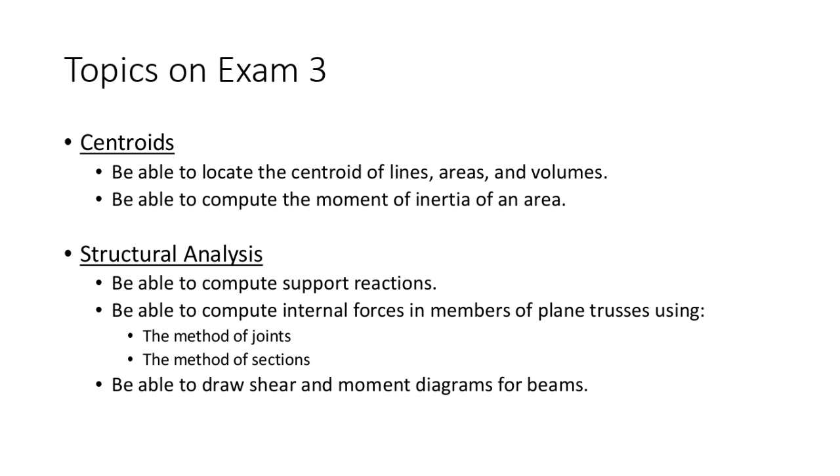And number 2, I've really tried to do my best to ensure that this isn't a time crunch. I know that's probably a concern you have, with some of the homeworks and exam problems you've done. I've really tried to make the problems manageable and contained. So that's just something to keep in mind. Obviously you want to be organized and moving through the exam, but I've tried to formulate the problems to accommodate that.

In terms of some review content, the rest of this presentation is just formulas. Now let me say this, I'm not foraying too heavily into the 3rd dimension, but that doesn't mean you don't need to understand concepts related to it, because there are conceptual questions on the exam as well. So I might ask some short answer questions on 3D. I don't want you to ignore it. I'm just saying we only have 50 minutes, and I don't want to focus too heavily on that one topic because we've got a lot of other stuff to cover.

Make sure that you understand the concepts of moments of area. The integral of dA is your area. The integral of x dA is your first moment of area. We use the first moment of area to determine centroids. The second moment of area is used to determine the moment of inertia. The second moment of area is the moment of inertia.

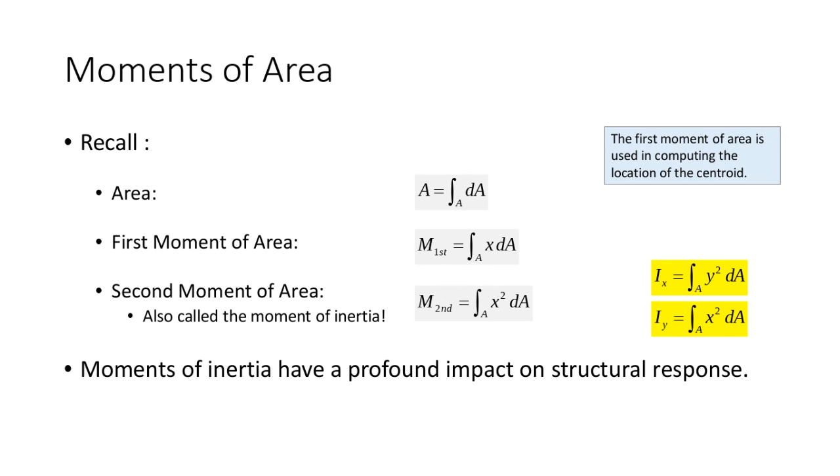I went ahead and threw in this slide. In our lecture notes for centroids, this slide popped up a lot. It was just the 2D centroidal reference table. This is not a comprehensive list, and I don't want you to look at this and say this is all I need to know. But this is in your textbook, and it's in the NCEES reference manual.

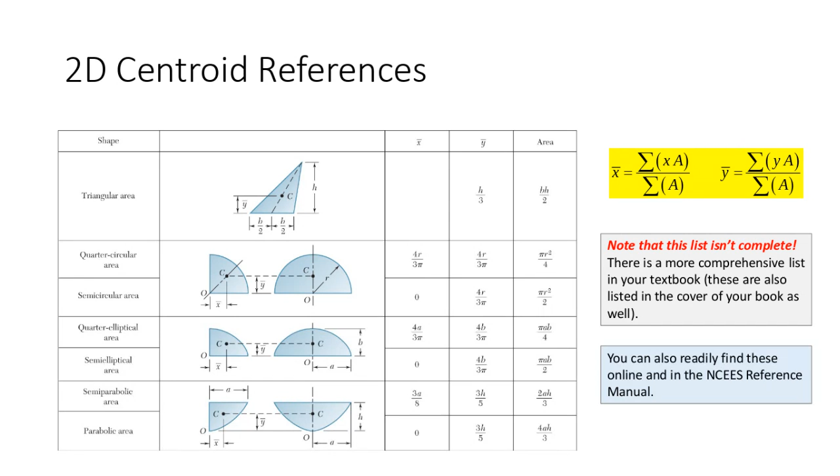I don't have a problem with you finding additional centroid references, but just make sure that you know where they are in the book. Make sure you have them available, because centroids is a part of this exam, and this is a necessary tool. So make sure you have this readily available, because I don't think it's a spoiler alert to say that you're going to be using this on the exam.

I did go ahead and include the 3D centroid references just for completion's sake, but again, as I said, we're not delving too far into the 3rd dimension on this exam.

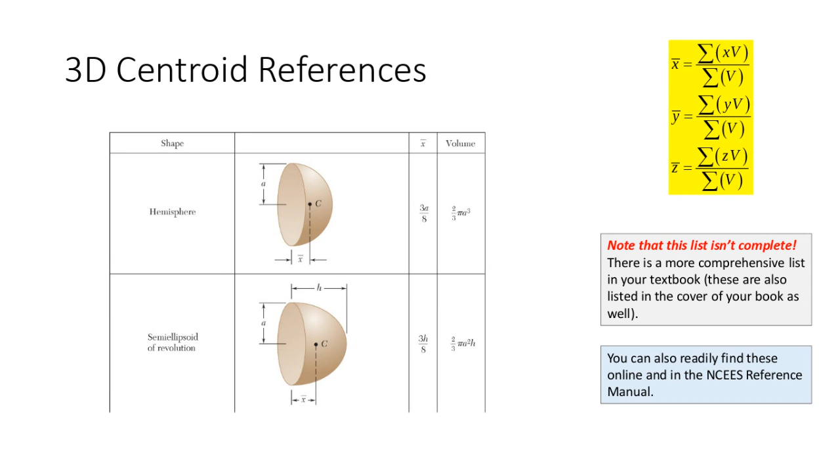And I'll go ahead and tell you that our final topic in this class, which is friction, doesn't delve too heavily in the 3rd dimension as well. I know that doesn't really have too much to do with our exam, but friction isn't really a massively 3D topic. It's largely a 2D topic. But I thought I'd throw that out there.

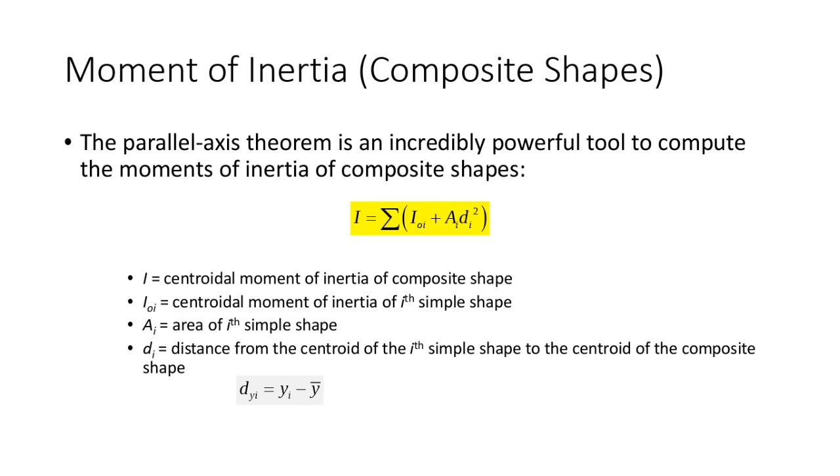I went ahead and threw the formula or the algorithm for determining the moment of inertia using the parallel axis theorem. The hardest part, I'd say, is probably your d distances, but that's just y minus the y bar for each shape. References for moments of inertia as well. Probably not a bad idea to have that available also.

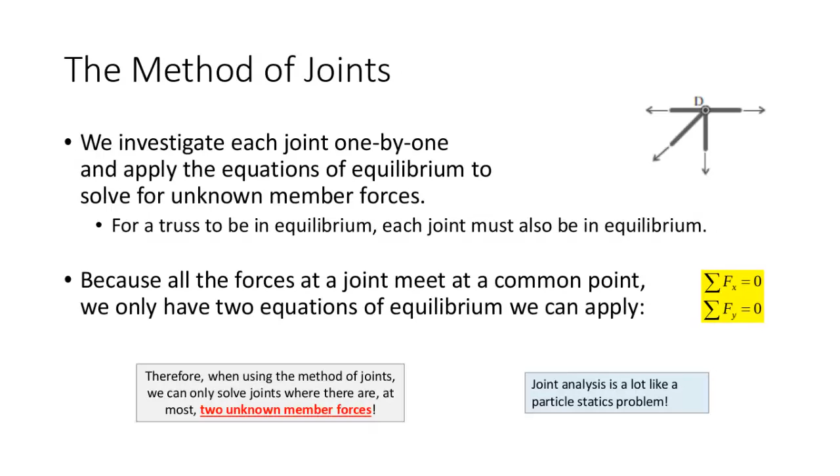And then we're getting into the structural analysis component. So just the data or the description of the method of joints, the method of sections. And then the last few slides are on the derivation and the derived relationship between loads, shears, and moments when you construct your shear diagram.

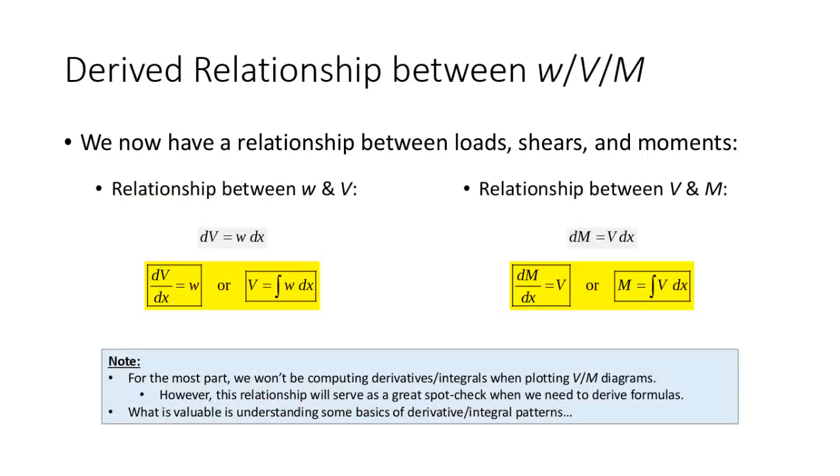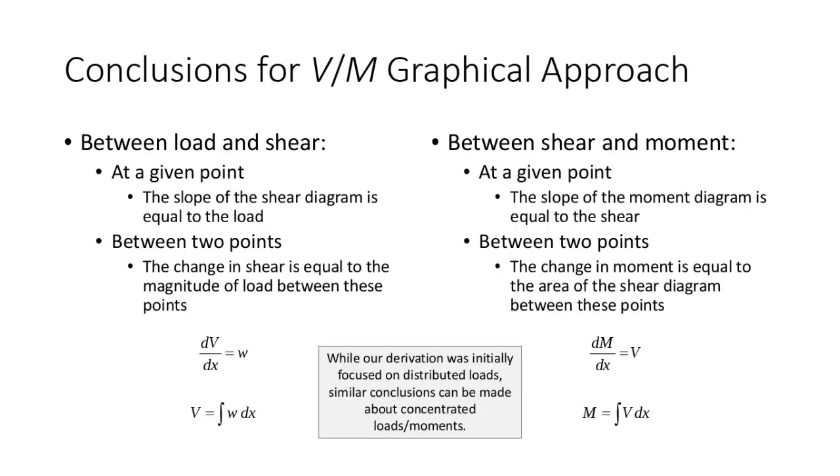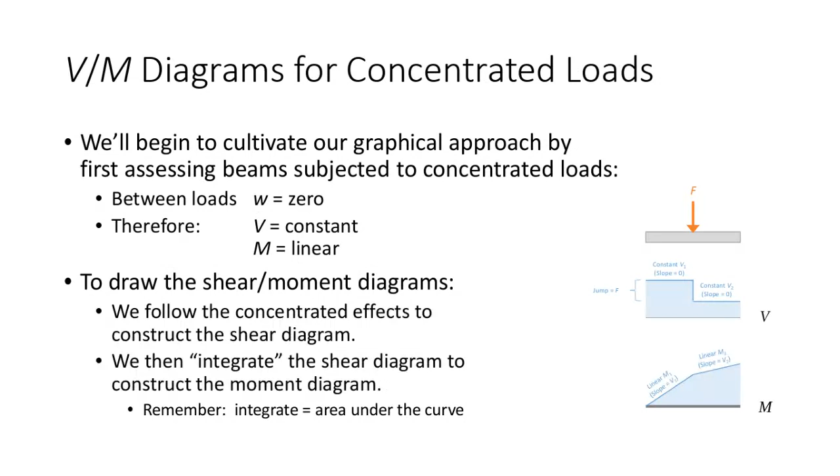So this is our derived relationship. These are the conclusions that we made for our graphical approach, like between shear and moment. If you compute the area under the shear diagram, that gives you the moment diagram, all of that. And then our methodology for constructing shear and moment diagrams for regions subjected to concentrated loads and for regions subjected to distributed loads. And that's the review slides. That's pretty much it. So yeah, that's going to be it for what's covered on the third exam.

And with that, I'm just going to turn it over to you and see what questions you have and see if there's anything I can address. Floor is yours.

We can. I'm afraid during the review, well, we can, and I see a couple people agreeing with that. I'm afraid during review that a quick joints problem will turn into the entire review, and that's fine. I have no problem with that. But if there's any shorter questions, then I want to give those their time as well. And I mean, if there aren't any, we'll do a joints problem, and that'll be the review. Give me 1 second.

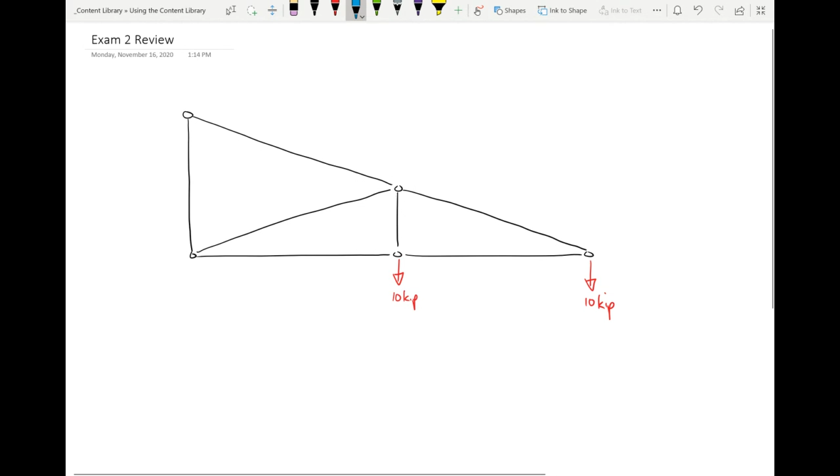Actually, hold on. Actually, let me see. Raise that a little higher. Sorry, I'm trying to make this neat. Okay. First off, before I continue, is this unique enough? Is this a good problem? Okay, good. All right, so this is a truss that's an overhanging truss.

The dimensions on this are, this is 12 feet. This is also 12 feet. And these dimensions here are 5 feet. Okay, so yeah, so this is going to be our problem.

Before we delve into this, because we've had requests to do both method of joints and method of sections, I'm probably going to go somewhat expeditiously through this problem. So like as I'm going through this, I'm going to try and take pauses and see if people have questions, but at the same time, I'm going to be moving a little bit.

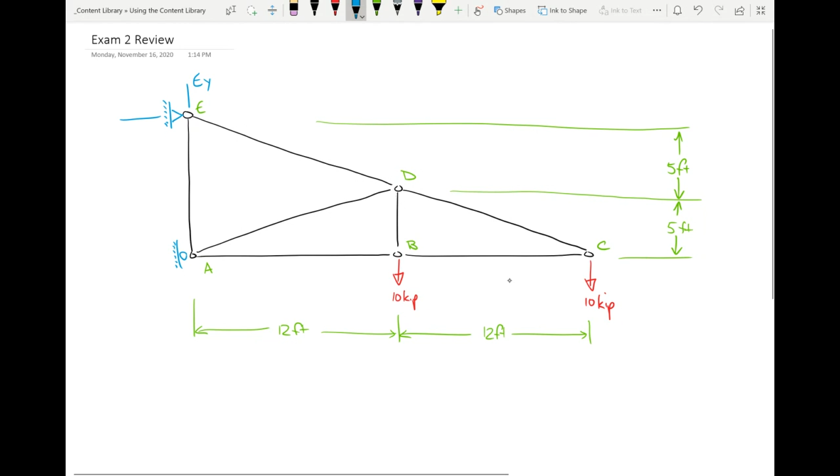So with that, first thing we need to do is compute the support reactions. There's going to be a reaction here, EY. There's going to be a reaction here, EX. And there's going to be a reaction here, AX. That's a roller, so it only has one reaction in the direction of the roller, and since the roller is facing left to right, it's going to have a horizontal reaction.

First, I'm going to compute the vertical reaction, and that's pretty easy. If I sum forces in the Y direction, I've got 10 going down and 10 going down, so EY has to be 20 kips going up. That's going to be 20 kips.

I'm assuming it doesn't matter which direction you look when cutting sections of trusses, like in homework 6.2. It ultimately does not matter because equilibrium doesn't care which direction you analyze.

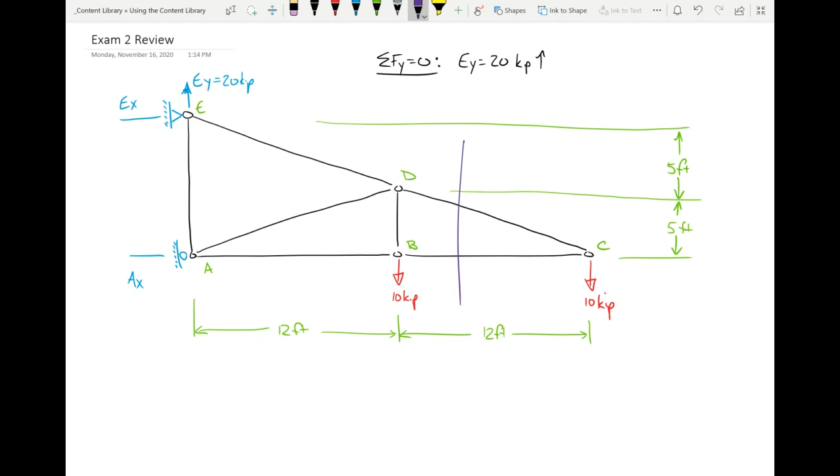That being said, there are advantageous directions to look. There's nothing stopping you from cutting a section through here—it really wouldn't be necessary, because for something like this I'd just use a method of joints. But for the sake of discussion, if I cut a section here, I could look to the right or to the left. I'd look to the right, because there's a lot less going on looking right than looking left. Equilibrium doesn't care, physics doesn't care—you'll get the same answer either way.

But just because equilibrium and physics don't care, doesn't mean the amount of lead your pencil expends on the paper won't care. One of these directions is just going to be less work, so I tend to look toward the direction that makes the problem faster—I tend to be lazy in my calculations. If you have a truss with members all over the place and you're cutting a section, I'd look to the right because there's less going on there than to the left. Be lazy in your analysis.

Fire these questions away as I'm doing this math—this is your review time, so don't hesitate.

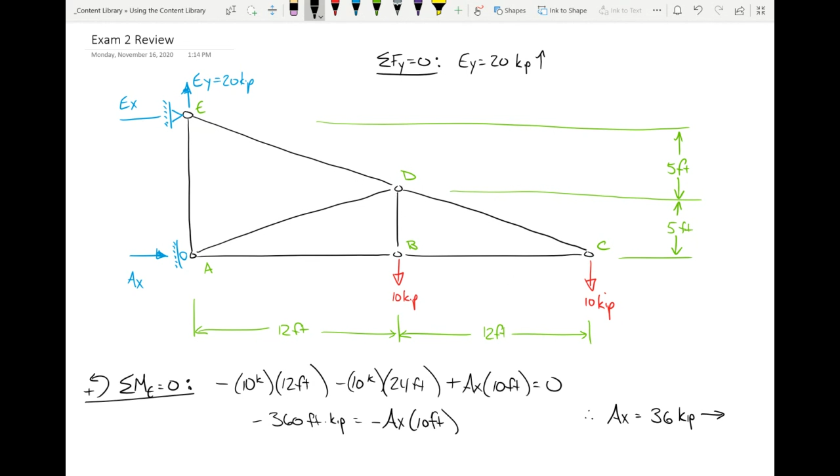So I got 20 down, so 20 up, and now I need to sum moments. I'm going to sum moments about E—it doesn't really matter. Summing moments at E, I've got 10 kips, which is negative, times 12 feet, minus 10 kips times 24 feet. AX has to resist that, so plus AX times 10 feet equals 0. 10 times 12 is 120, 10 times 24 is 240, so that's minus 360 equals negative AX times 10 feet. So AX is 36 kips going that way. And if AX is 36 kips that way, with no other horizontal forces, the sum of forces in the X direction equals 0 tells me EX is 36 kips going the other way—that's a force couple, equal and opposite.

So this is 36 kips, and this is 36 kips. Is everybody okay with that? Any questions before I move on? Because you've got to be able to do this for trusses, for shear and moment—if you can't do the reactions, or can't compute the support reactions, that's going to be a challenge.

Okay, so we're going to take this truss and we're going to do it two different ways. We're going to do the method of joints and we're going to do the method of sections. So let's do the method of joints first.

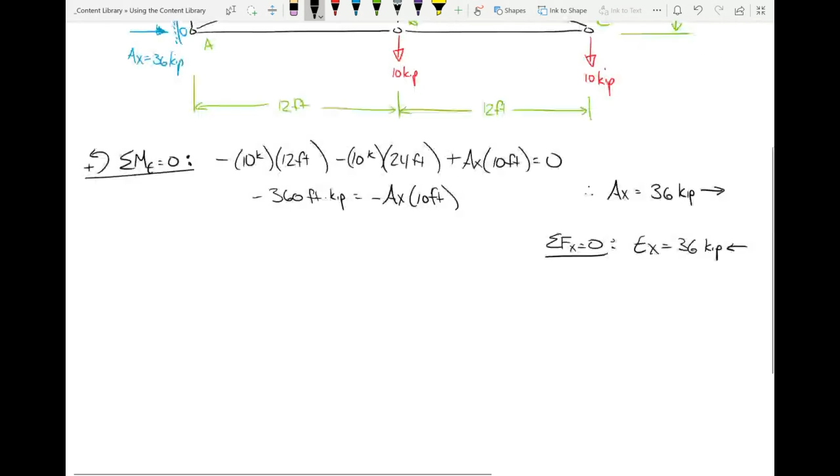Let me write something down real quick because I don't want to scroll a bunch. I'm just cheating and writing down the reactions for me as a shortcut. Okay, so first off,

the method of joints. Now, before I do the method of joints, the first thing I want to indicate... what, hold on, what?

Well, it's going to the left, yes. If you consider negative, yeah. I mean, I guess you could say that, yes.

The one thing I want to clarify, whenever you start expressing forces and directions and results, is it's okay during the math to treat values as positive or negative. That's fine. But what matters, and what's really going to matter from an engineering perspective, is the context.

See, in your comment, you said that EX has to be negative. Well, yeah, EX is negative if you consider positive forces to the right. What I really care about is that EX equals 36 kips to the left.

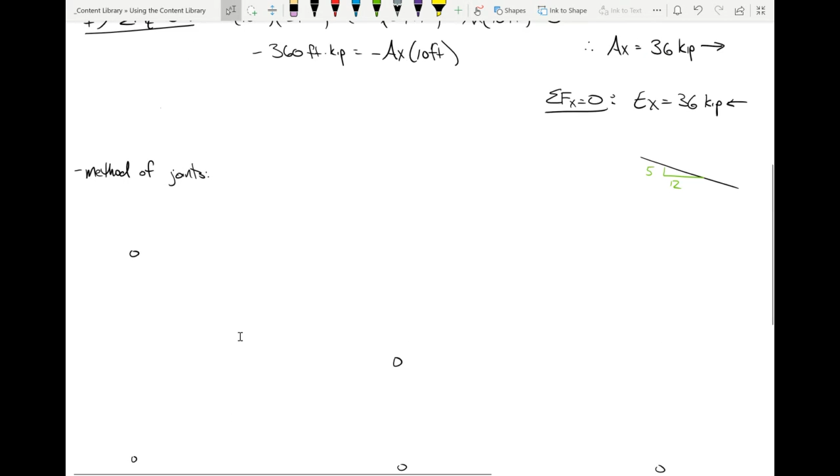Now, when I do this, one of the things I sort of glossed over with this example is if you look at all of the diagonals, they are at a 5 to 12 slope ratio. On this problem, as you can see, they all go over 5 and up 12.

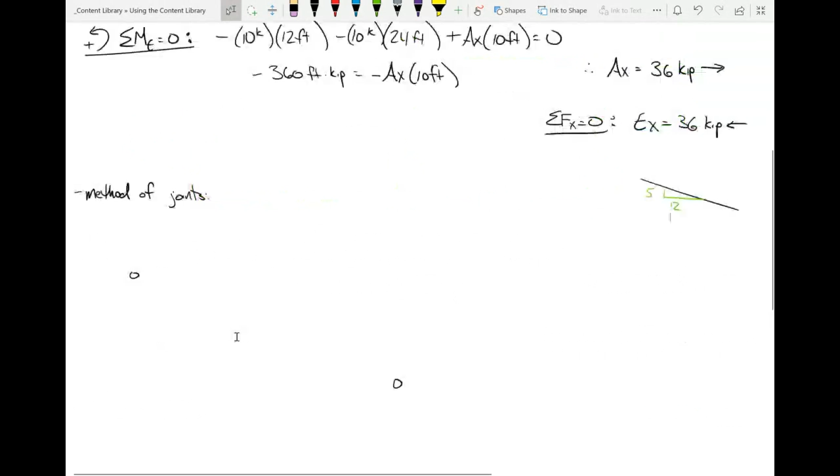So, over 12 and up 5 -- I said that backwards. Because they're at a 5 to 12 slope ratio, does anybody know what the hypotenuse is on a 5-12 triangle? I'm just curious. 13, yes. Like a 3-4-5, a 5-12-13 is a special triangle.

So there you go. Okay, let me start off by putting my diagonals here -- or sorry, not my diagonals, my members. Okay, so there's my members.

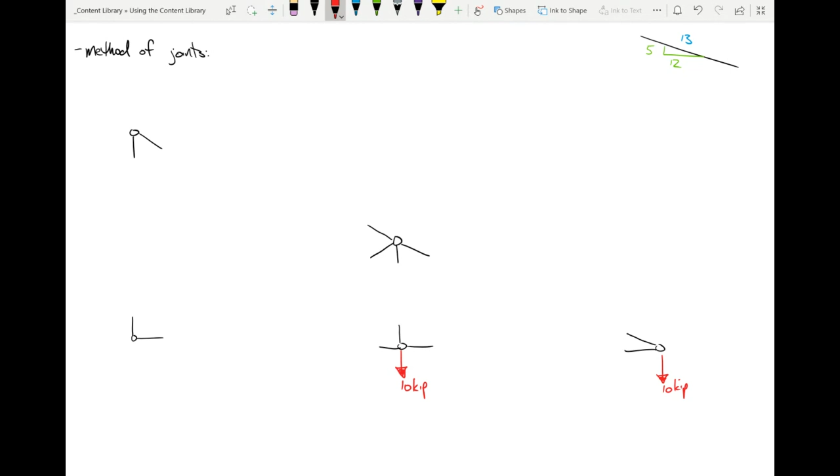Next thing I'm going to do is put my applied loads. And the next thing I'm going to do is put my support reactions. So we got this was 20 kips. This was 36 kips, and this 36 kips.

Now, I apologize, this is my last time I'm going to scroll up and down. Just making sure I remembered how I labeled them, right? So this was A, B, C, D, E. Sorry for the scrolling up and down.

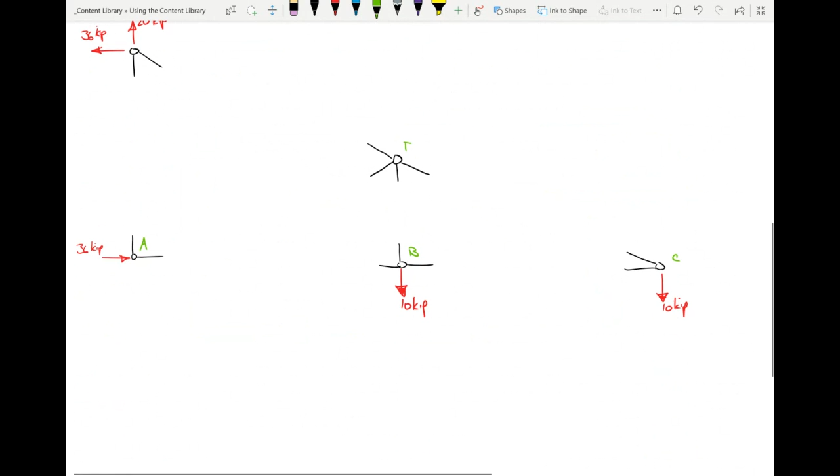I'm really trying to not do that. I couldn't remember how I labeled them because they're labeled a little differently than they are here in this book, but I thought this made a little bit more sense. Okay, all right, so this is our problem.

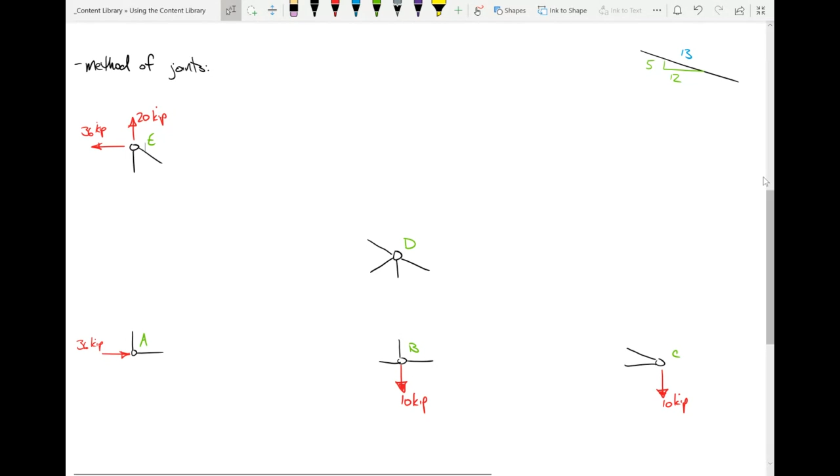Now, who in chat can help me out with something? When you're doing a method of joints analysis, what's your limit on your joints? Oh, I forgot one. There's a member right here.

Who remembers the limit? There's a limit on when you do a joint analysis. Two per 2D joint, exactly. So when I start my analysis, I cannot start right here, I cannot start there, there's too many unknowns. I've got 4 members, that doesn't mean I can't solve joint D, I just can't solve it now. What are the 2 joints that I can solve right now? E and C. So it doesn't really matter which one we start with. I'm going to make an executive decision and say we're going to start at joint C.

So joint C has 1 horizontal unknown here, and then it has 1 horizontal, 1 vertical right there. So let's sort of track this out. If I've got 10 down, 10 up.

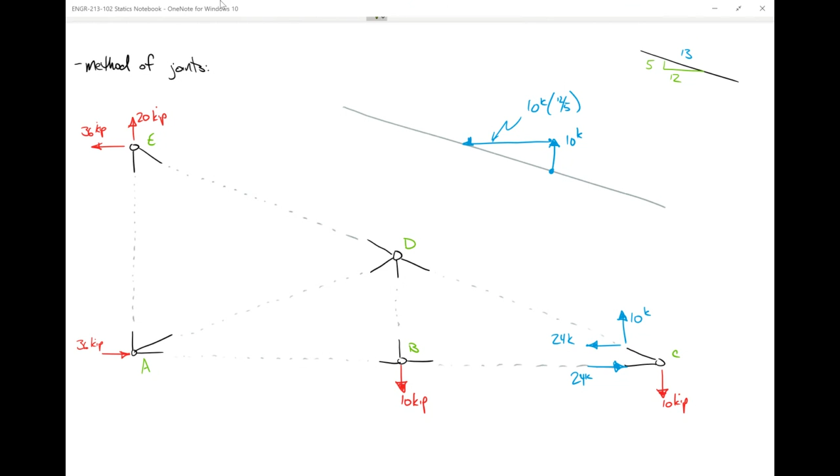Now what I'm going to do is I'm going to start transposing the results onto the adjacent joints. So this one's going to be 24 kips, this one's going to be 10 kips. And then remember, when you go to the next joint, opposite directions. 10 up means 10 down, 10 to the left means 10 to the right. Again, think of that tug of war example, equal and opposite, equal and opposite. This one right here, 24 to the right, 24 to the left, right? And I'm using a different color for those because what I'm trying to do is track, okay, when I look at, let's say, joint B, I knew the 24 kips from the adjacent joint over on the right.

So yeah, okay, now I want you to look at the truss right now and tell me which joints, plural, I could do right now. Now we had said joint E before. There you go, we could do joint B right now. And I don't know about you, but I like to do joints that have less diagonals going on because there's less to figure out, I can move faster through the problem. In other words, look at joint B: 10 down, 10 up, 24 to the left, 24 to the right. Done.

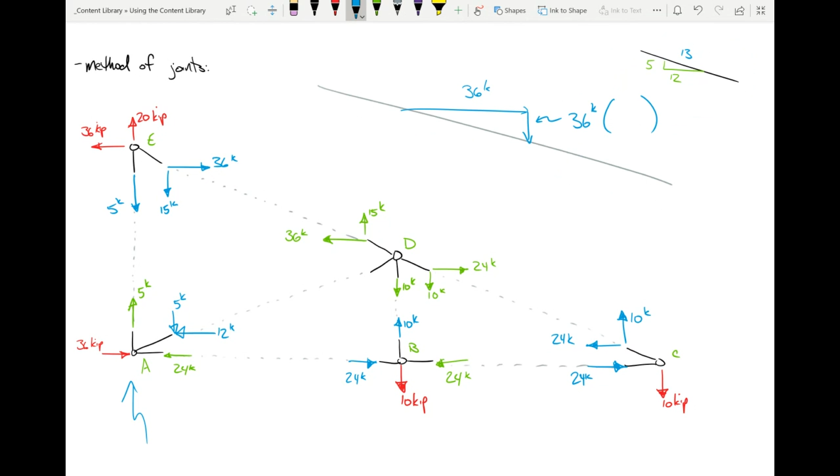How did you get 15 again? Oh, are you talking about that one right there? Okay, give me one sec. So here's the member, and we had that this was 36, right? So how do you get that? Well, we're going to take 36 and multiply it by one of two things, either 12 over 5 or 5 over 12. You can see from the slope ratio that what we would need to do is multiply it by 5 over 12, because that leg's going to be the smaller one. So 36 times 5 over 12 is 5 times what? 36 over 12 is 3, which is 15. So all I'm doing is using the slope ratio.

No, that's fine, that's why we're here. So if there's any questions about that stuff, let me know. Oh no, that's fine, that's fine. We'll still probably take a look at this method of sections because I still think it's beneficial. I'm sorry, I'll try and get this posted to YouTube as soon as I can.

Okay, one final thing I want to do is look at this member. This is 12 kips, this is 5 kips. If you look at this last joint, and again follow my color scheme here, there's nothing to do on this joint because it's completely solved. We already know all the forces, but just look at the values. It's really slick how everything matches up, okay? Look at this, look at your verticals. Watch your verticals. This goes up, that goes up, 20 going up, 10, 20 going down. What about your horizontals? 12, 24 to the right, 36 to the left. Everything matches. It's so cool how that works out, that in the end it all balances.

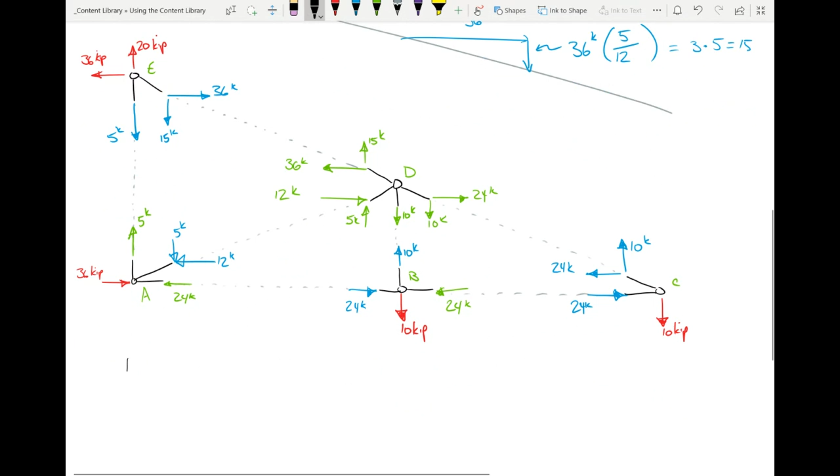Right? So let's handle the horizontals and the verticals first. Let's start with this member, BC. Member BC, we know that the magnitude is 24 kips.

The question is, does member BC experience tension or compression? I'm asking you. All right, we got tension. Now that is incorrect, okay? The reason why is, here's the joint, here's the joint. Both of those 24 kips are pushing on the joint, right? Yeah, I said BC, I'm sorry, maybe I was looking at the wrong one, maybe I was saying the wrong member.

See, if you have a truss member in your hand, so like if you see me on camera, I've got a member in my hand. Now imagine if I wanted to apply compression, I'm going to push on the member. What's happening on my hands? The member is pushing back on my hands. So those 24 kips, they're pushing on the joints. Member BC is 24 kips in compression, right?

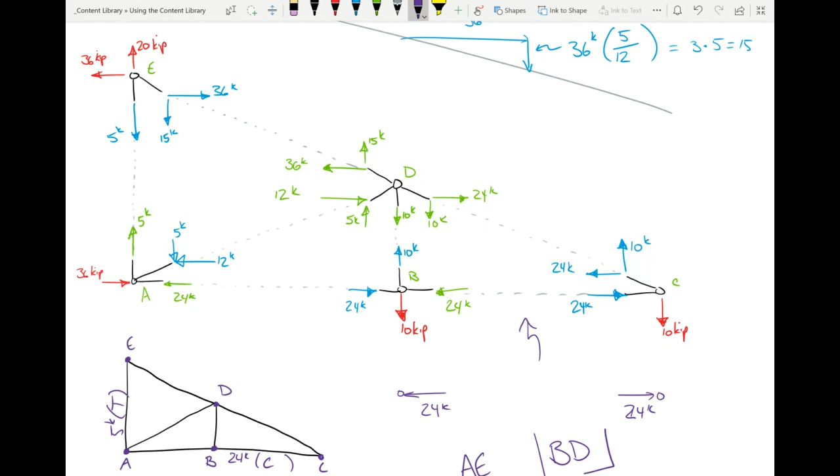All right, let's try another one. BD. Somebody help me out with member BD. What's BD experiencing? It's experiencing tension, and how much? There we go, 10 kips in tension.

So to summarize, this is what you're doing: you go to each member and identify whether it's experiencing tension or compression and how much. Member AB is experiencing 24 kips in compression. So that's going to be 24.

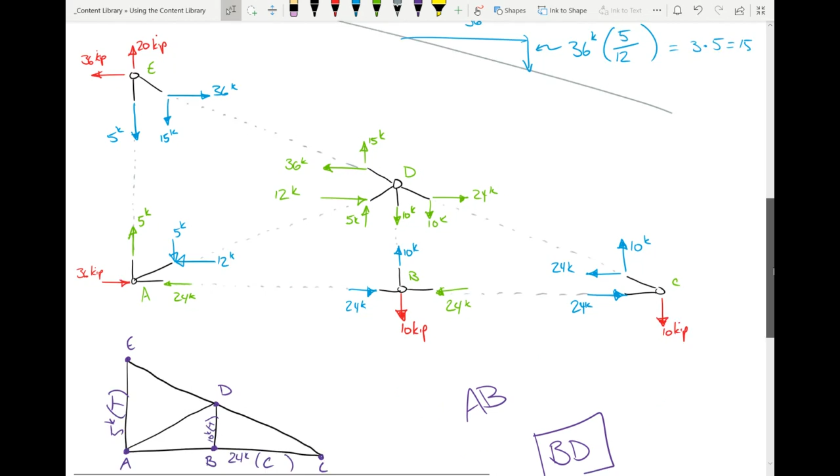As for the remaining members, which are diagonals, just break out the Pythagorean theorem. For instance, member AD is a diagonal member. First off, is member AD experiencing compression or tension? Compression, exactly right. And as for how much, just use the Pythagorean theorem. What is the square root of 5 squared plus 12 squared? 13.

Now we're running short on time. I could try to knock out a super quick sections analysis, but we're probably going to bleed over a bit, so I was a little afraid of that. But does this make sense? This is important—everybody seemed to want to see this. Even the one person who said they wanted to see method of sections actually just wanted to see this.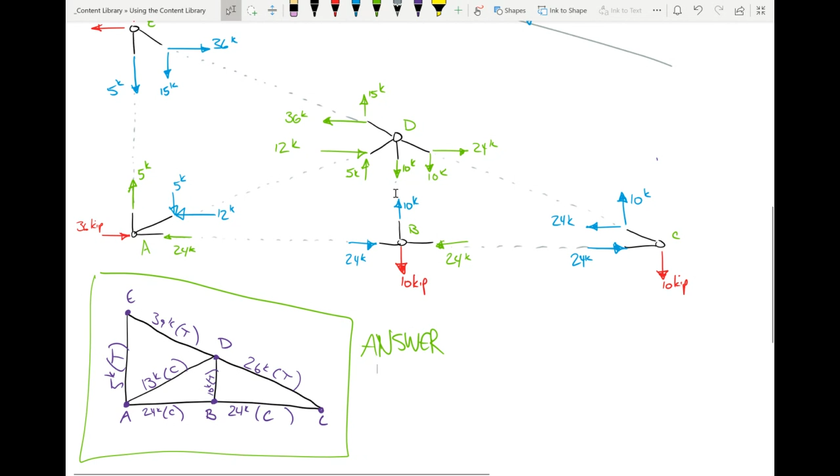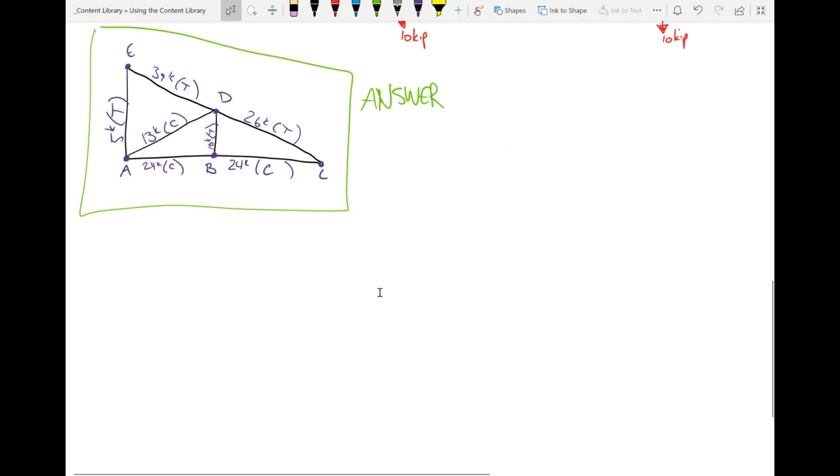One thing you can do to tie a knot on this whole thing, if you want, is go back to this problem and ask what would happen if you cut a section. Here's a challenge for you: cut a section, look to the right. I'm challenging you—that's the whole point. Try to solve for those 3 members that cross the section; you already have the answers down here, we've already figured them out. So cut a section and see if you can come up with the same answers I did. So there's a challenge for those of you interested in doing method of sections, because the answer's already figured out.

All right, any questions before we call it?